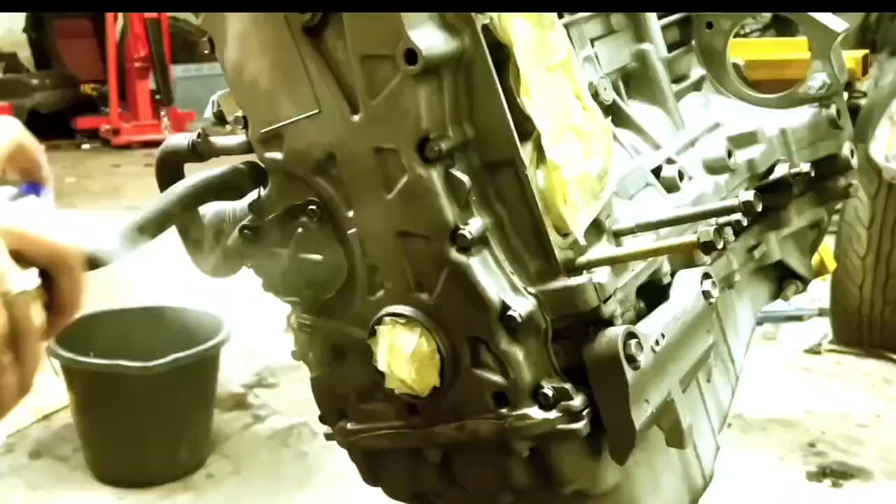This is my £1,000 Civic that I've bought. And today we're diving headfirst into the chaos that is our £20,000 turbo build.

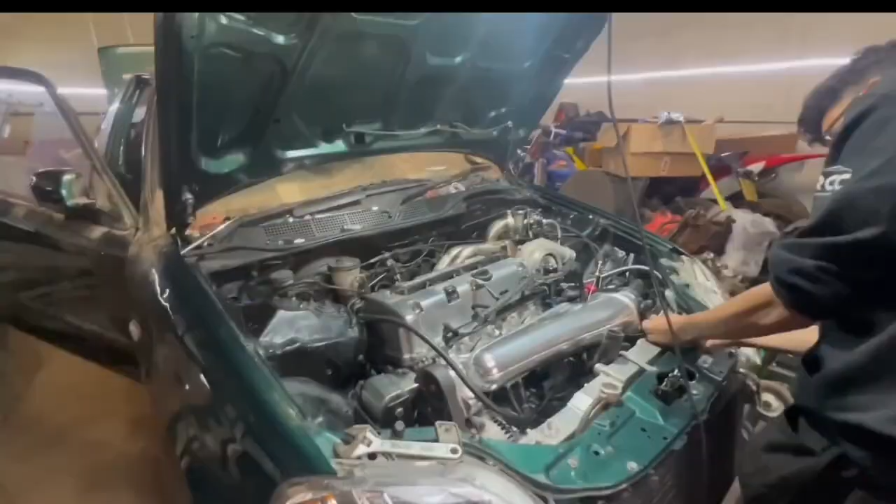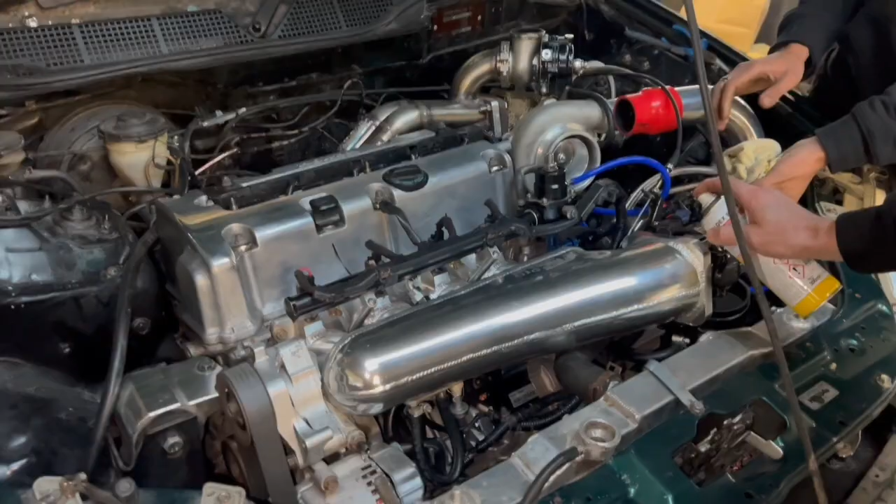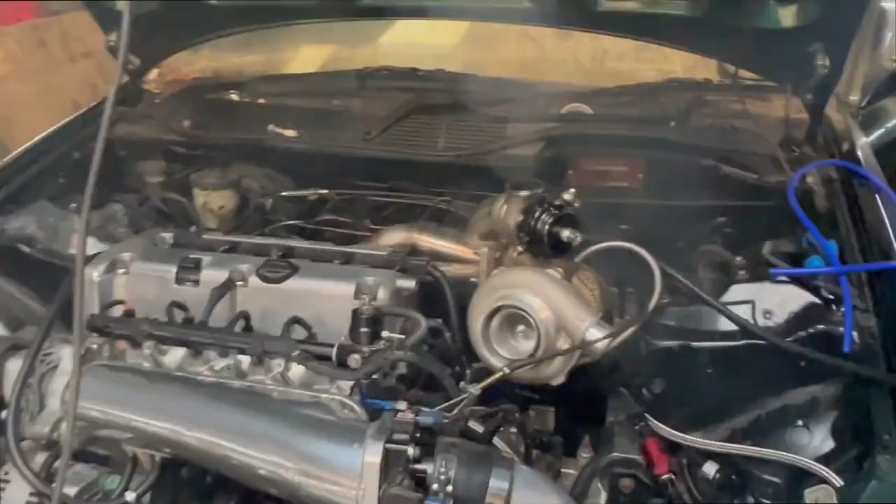If you saw the last episode, you'll remember that we finally got the Civic to fire up, but it sounded like a rotary, literally ran like Chitty Bang Bang. What was going on? This was supposed to be the easy part. The car was built, the drag strip was booked, but the second we turned the key, everything started going wrong. The idle was hunting like a rotary, fuel was spraying out from the lines, thick white smoke started pouring out the back. It was going from bad to worse, and it didn't stop there. I think we blew the engine up. So I'm there thinking, oh my god, this piece's engine about to go kaput.

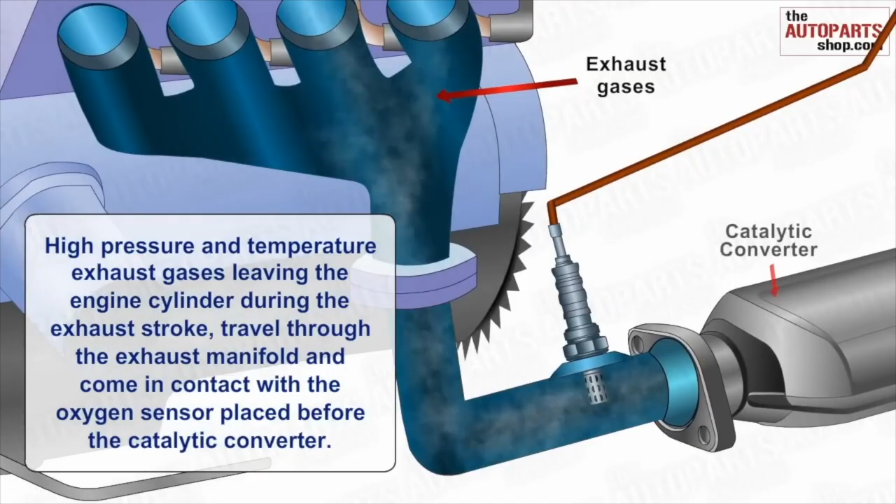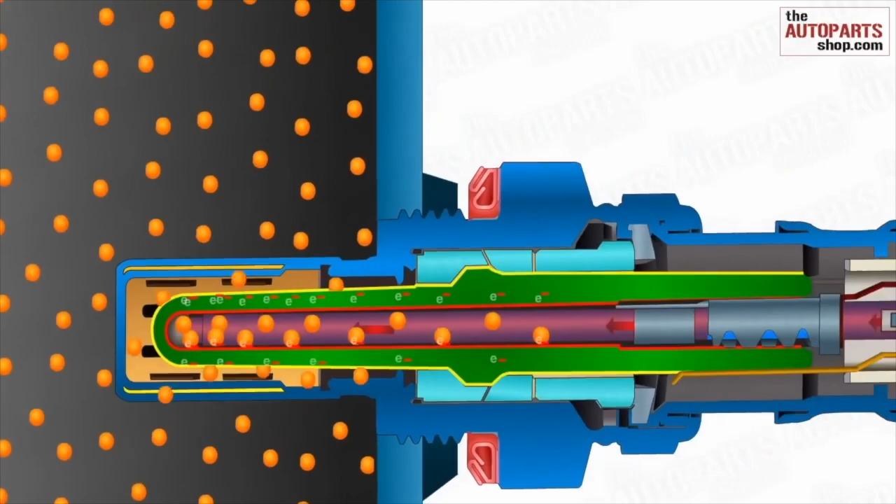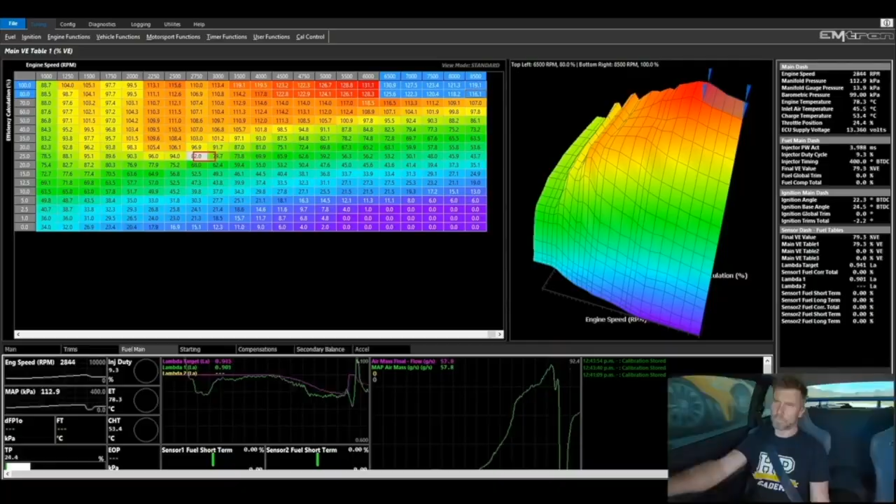Let's jump into it. The next important mod to the K20 Civic build is the wideband sensor. What is a wideband sensor? A wideband sensor measures air-fuel ratio and tells you exactly how rich or lean the engine is running, especially under boost. The wideband sensor is critical for any turbo build. It keeps the engine safe under boost by constantly monitoring the air-fuel ratio. If the engine runs too lean, it can blow up. We're aiming for that sweet spot, 14.7. Too rich, you lose power. Too lean, it's game over. It works with the ECU. If you're using Hondata K-Pro, which we are, the wideband can feed live AFR data into the ECU for more accurate control. Without a wideband, you risk running lean and blowing your engine. It's one of the most important sensors on any turbo car. That's why we're going to install it now.

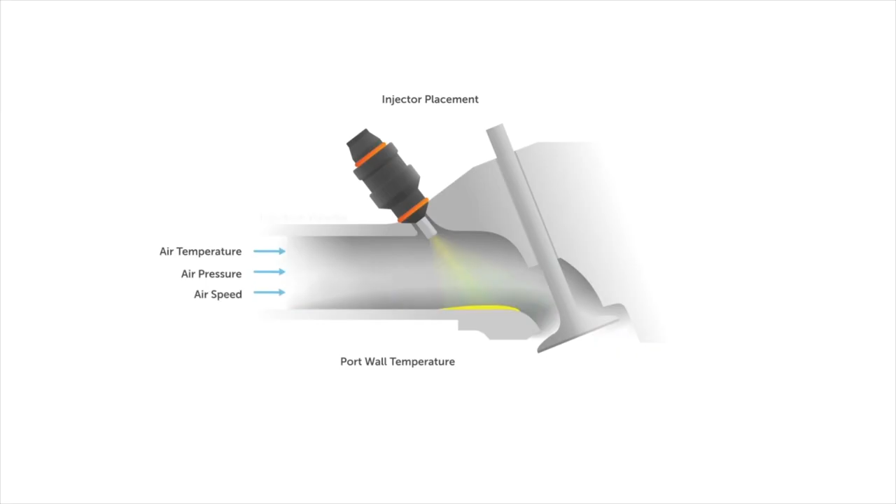Mike the engineer here. Come on, bro. Ta-da. Yes, the wideband's going to be installed right here. Get the boost gauge right here.

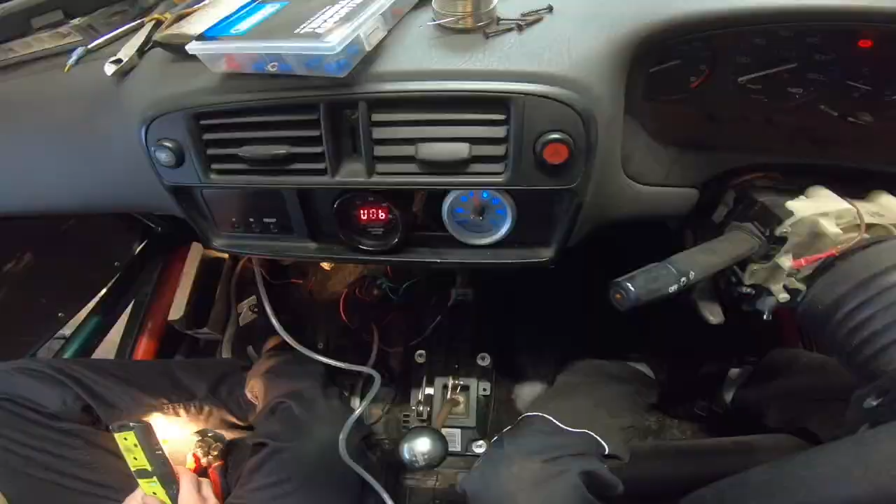So the interior's going to be all sorted now.

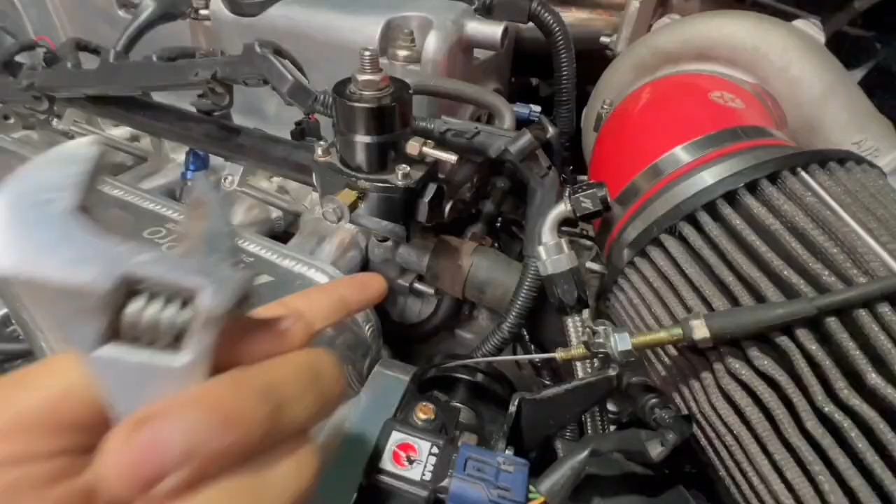We've done a bit of research and we've now got a few things to do to double check the fuel issue. We've gone ahead and taken this fuel pipe from this regulator. We are now going to take this one off and then see if there's any fuel coming out in either of the pipes. This is my first time doing this build. I've never done it before. I'm not a mechanic, I'm going to give it a try.

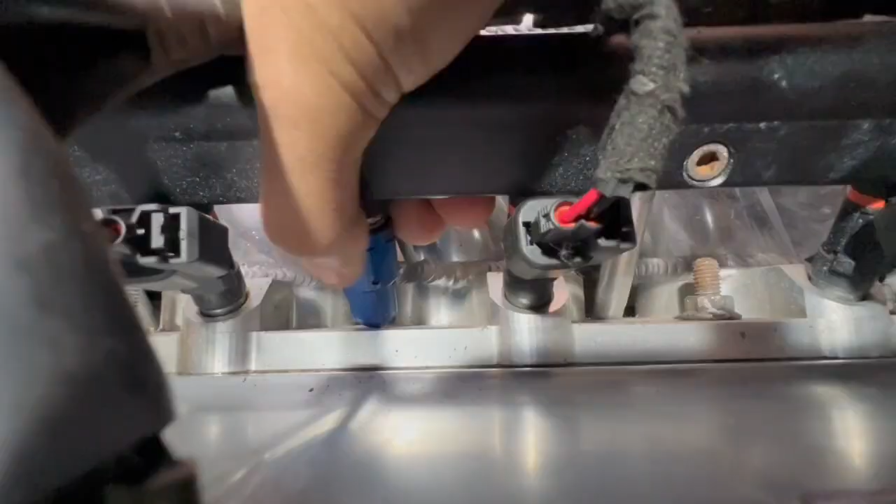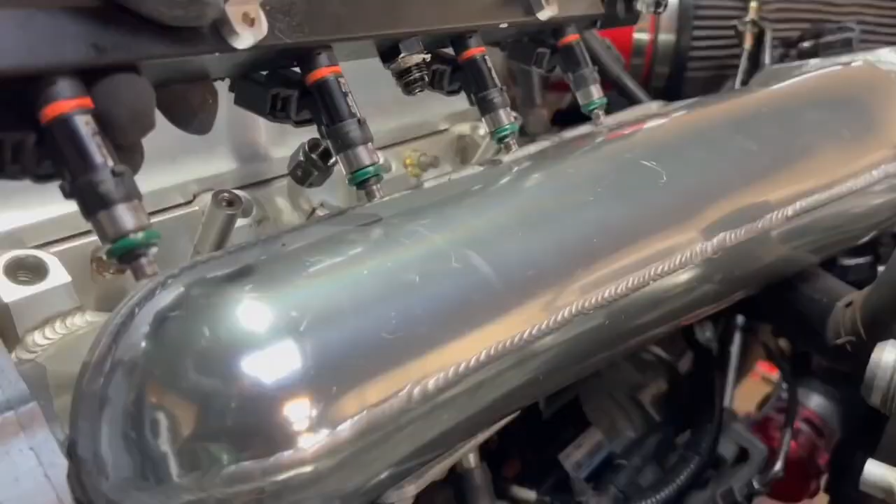So now I've got them both here. Great news, fuel's finally flowing at the return line. Now that we've confirmed fuel is flowing, it's time to see if it's reaching the rail and actually making it through the injectors. Yeah, go ahead. Okay, turn it off, turn it off, turn it off. Come out. Okay, turn it off, turn it off, turn it off. That is coming out like crazy though.

With all that working, the car should start now. I'll try and start it now.

Right, so another issue is this crank sensor wire wasn't on properly, so we got it out, we got it tested, we got it fixed. Now we're going to put this back into the engine and see if it works. Now it's in, let's start the car up and see if it works then. Boom!

After trial and error, we knew that the car was not going to start. So we did one thing, we knew the car started on stock K20 ECU. So we basically just reduced the injectors back to stock ECU level to see if the car starts with the K-Pro ECU. And guess what happened? I'm going to keep it running, you guys tell me when to turn it off. Alright, we're going to start it now.

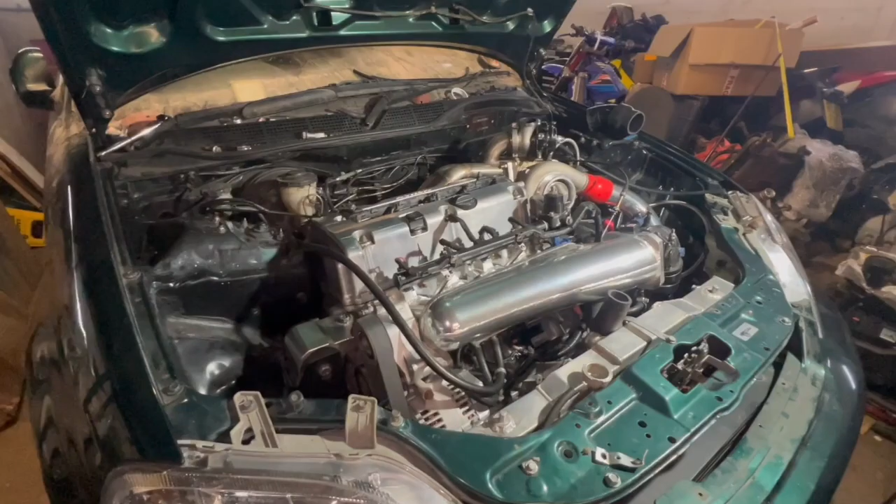Every success comes with setbacks, and this one nearly cost us everything.

Try it again. Yeah bro, it's not feeling it, man. Just very intermittent, isn't it?

So now, out of nowhere, the car's not starting again. Looks like it's time to dive back into the K-Pro ECU and start tweaking the fuel duty cycles, hoping we can bring it back to life.

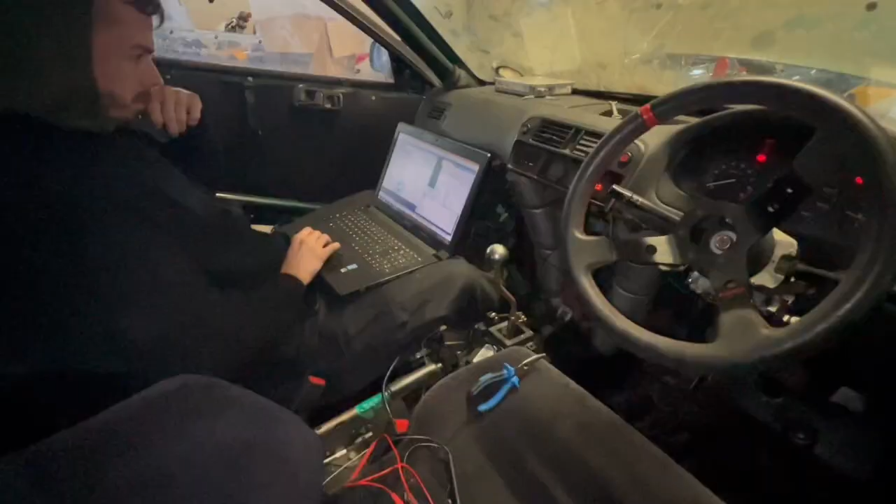I'm going to go anyway, it was 550 before. Lower.

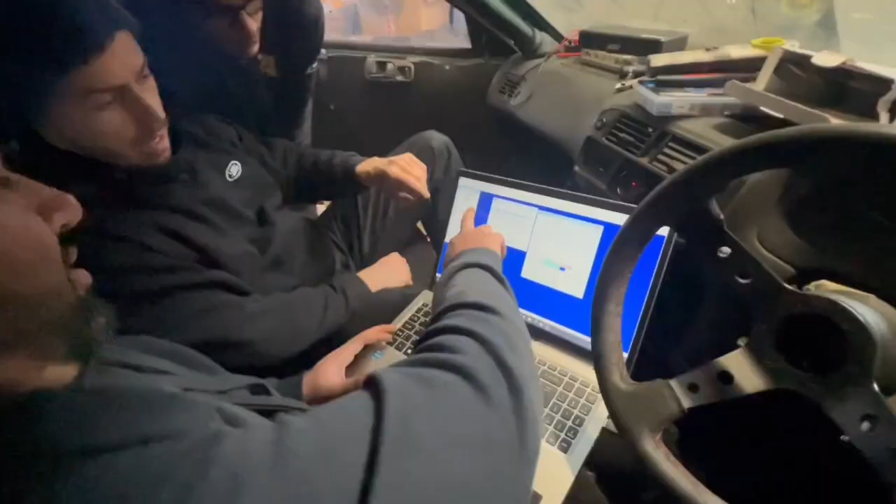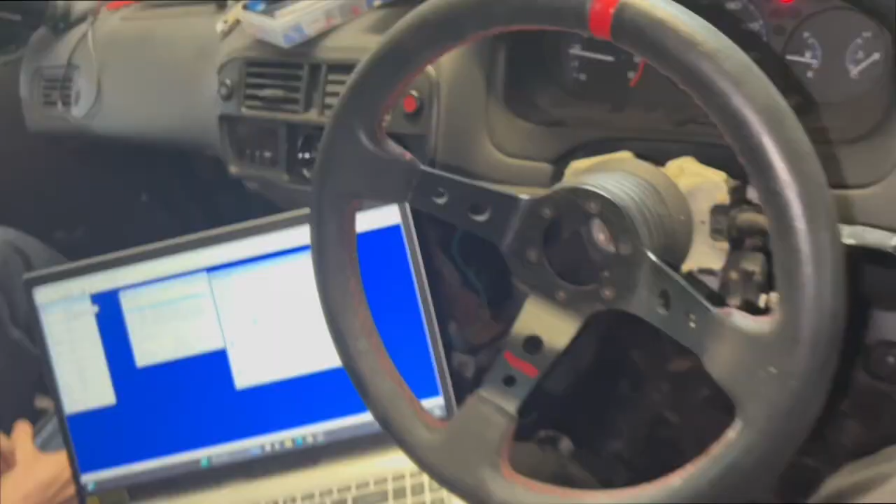The car starts, but straight away it starts blowing thick smoke. Just like that, everything goes wrong again. There's a lot of smoke at the back.

And now with all this smoke coming out the car, we don't know what's actually happened at this point. It's not looking good, guys. I think we blew the engine up, the head gasket's gone.

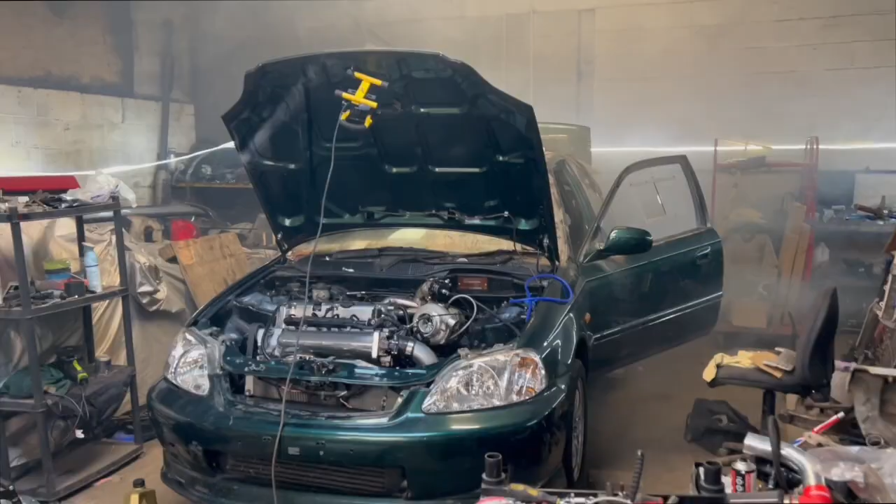At first we thought the head gasket was gone, the smoke had us convinced, but the coolant hadn't dropped and the oil wasn't milky. Two of the biggest red flags just weren't there, but for now it's still alive. So now we need to find out where the air is coming out from. I don't know whether it's the idle control valve with the ECU or there's some air leak.

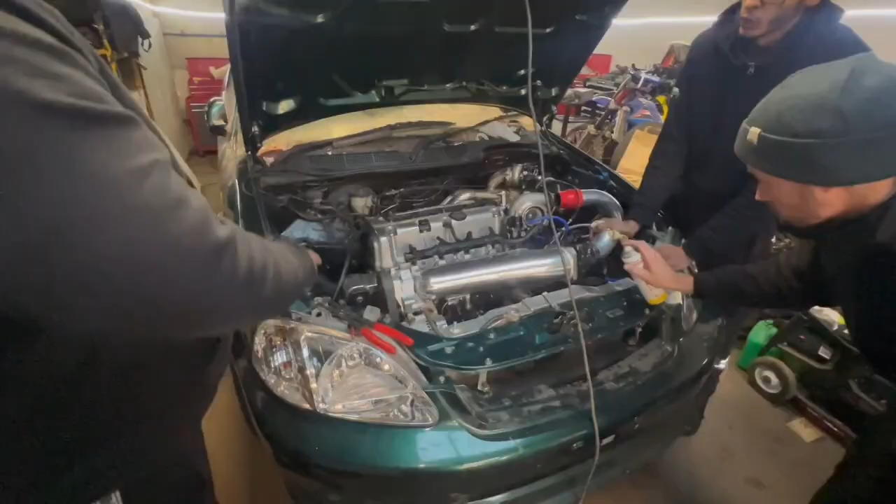Out of nowhere, a burst of fire shoots out between the intake and the engine block. Things just got serious. There are some problems. The car has got a gas leak coming from the inlet manifold, and there's also a gas leak coming out from the turbo manifold itself.

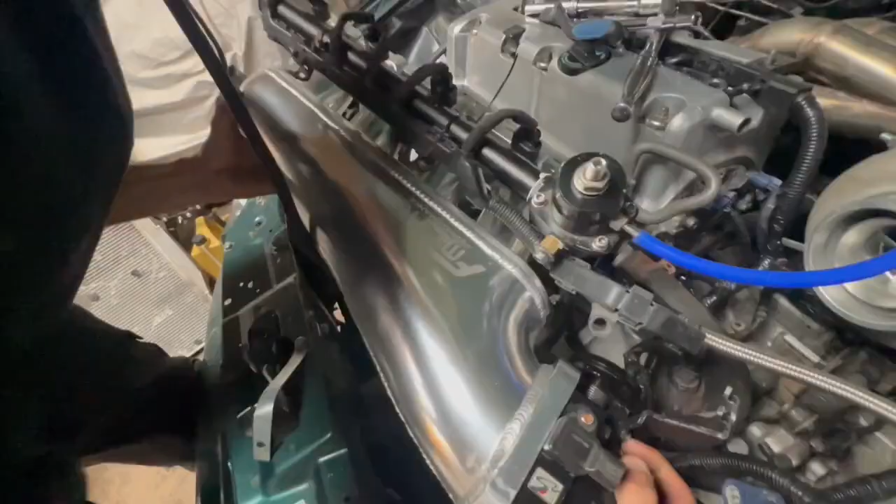Radiator's annoying. There we go, there you go, finally got it out. It's all peeling off. Yeah, brand new gasket it is.

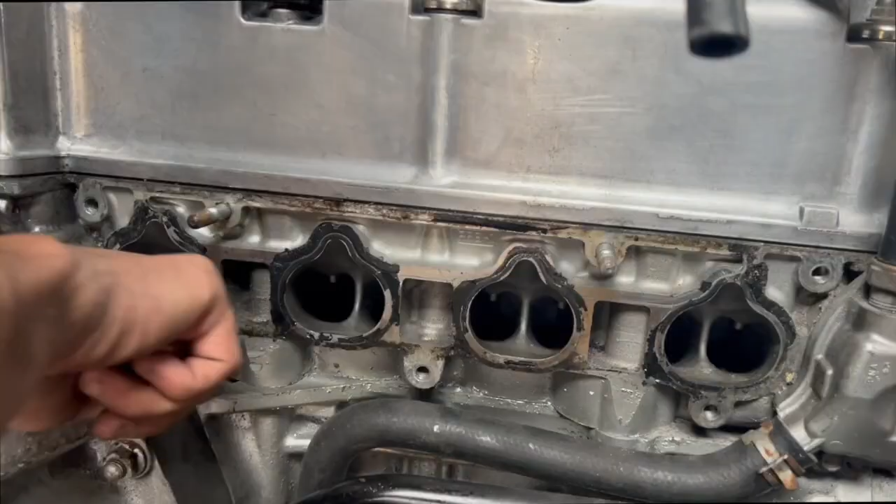So how's the engine, bro? We tested it, we drove this engine in an EP3. Now that we've got the inlet off, because it's like a drag inlet manifold, it just won't work with the stock water pump. You have to get a proper custom water pump for this inlet manifold. But because we're using a stock one, we're going to grind it down even more so it's a perfect fit.

We didn't know because we couldn't get the car started to find out, but now we know we can do it properly. After speaking to a few Honda people from the Honda community, a lot of people have said we might have toasted the ECU.

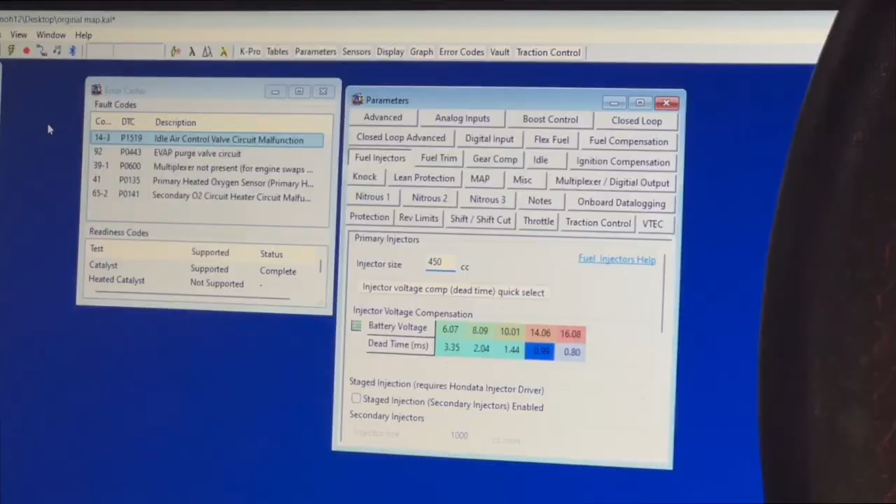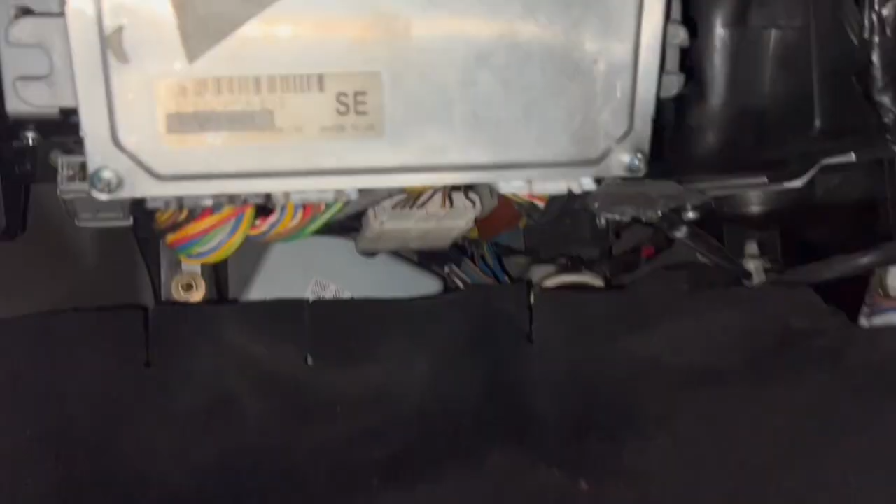The new ECU's in there, the K-Pro's ECU in. Now we're going to find out if this car starts up. Start the car and we'll find out if the ECU is good. So here goes. I feel like it is going to start. If it doesn't, I'd be shocked.

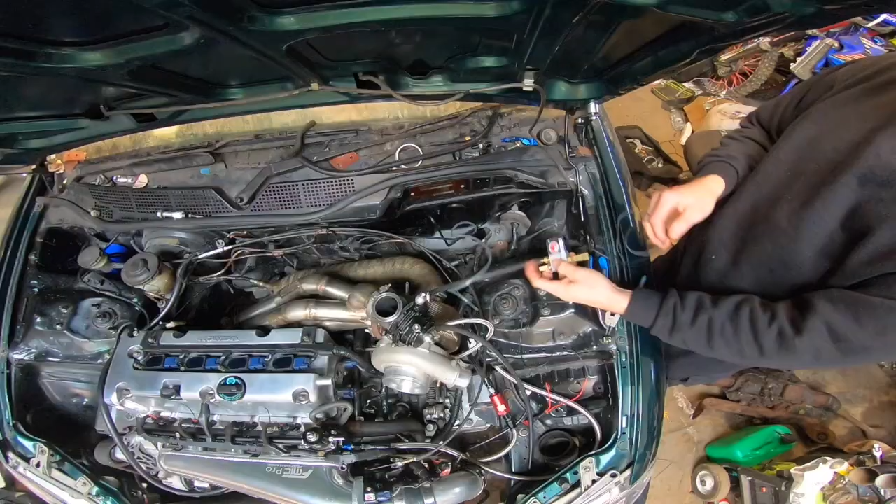Well, the ECU is good. Look, it's running all right. The ECU is good then. Oh, that's £1,000 saved then. Now at this point it's happy days because the ECU is not toast and we still get to save ourselves over £1,000.

Battery's all in, we're going to start the car up and hopefully this car is going to move from the ramp after God knows how long. But we need this onto the trailer because we're going to be visiting a person that holds a record of having the fastest Civic in Europe. Let's see if this car moves.

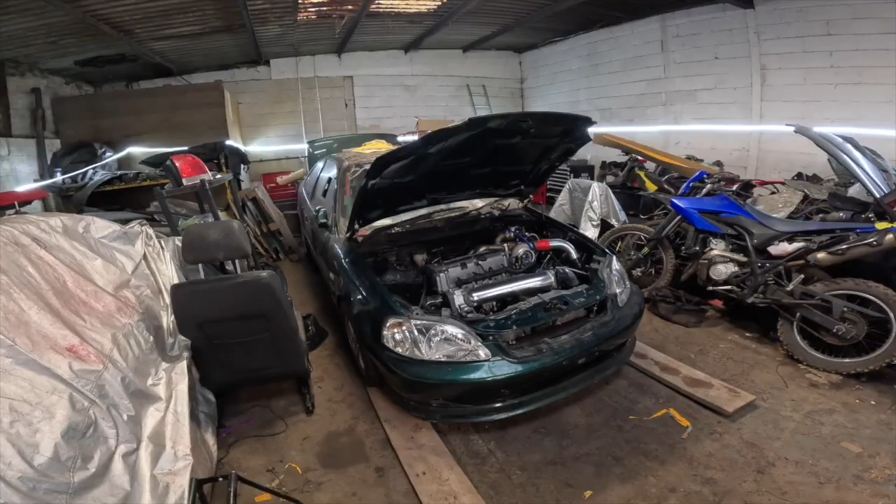Never did I think this Civic would make it out the unit, but here we are, driving it onto the trailer under its own power, on all four wheels. Is it finally ready? We're about to find out.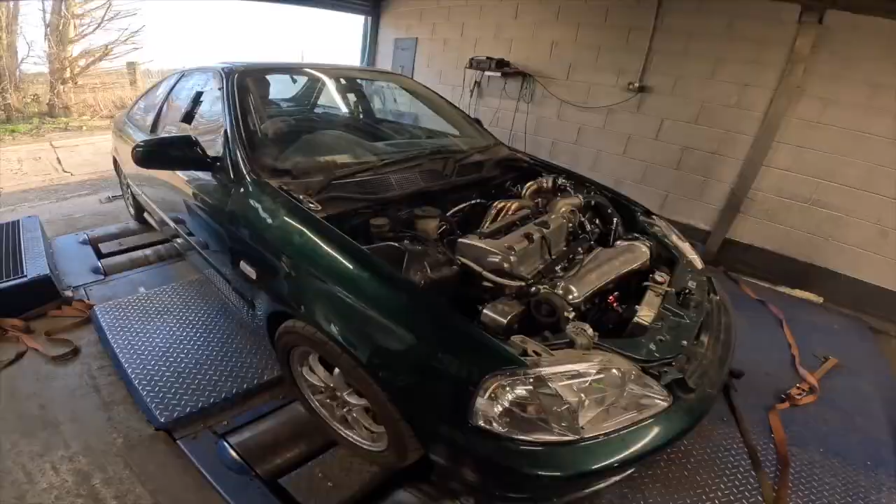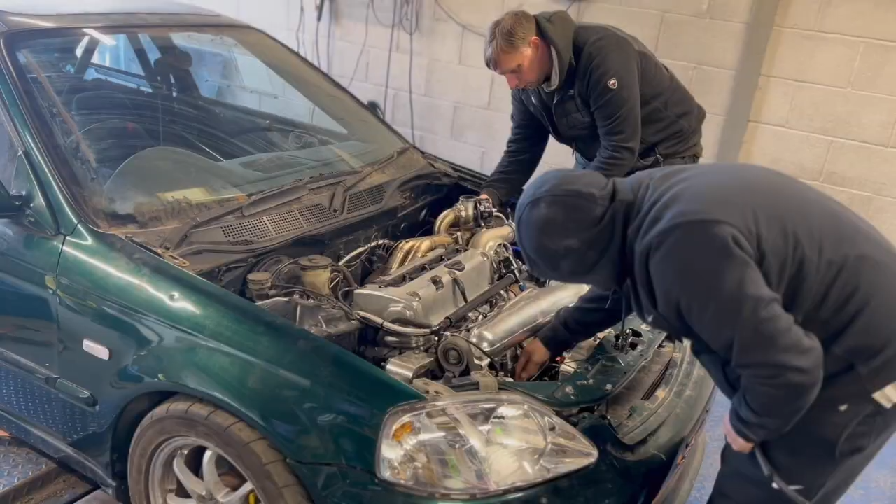We've just arrived at Street Racers where Gordon's about to dial in the tune on the £20,000 Civic build. When you're running out of time, out of options and chasing records, there's only one place to go, and with BMT holding the crown for Europe's fastest Honda, this is where serious cars come to get finalised. So here we are at Street Racers, ready for the Civic to be tuned. Let's find out how much power she makes, and I hope she doesn't blow off.

We're waiting for this final moment right here to see if it all pays off. And we're going to find out together. He's doing his magic. We're up here, Gordon.

Yeah. Come on, I want content. So what's going on now then?

Find a map in here. Just calibrate the TPS. Just got the map sensor settings in. Is that what I'm hearing right now as you're pressing it? As I'm uploading that, yes, so then the fuel pump will recycle.

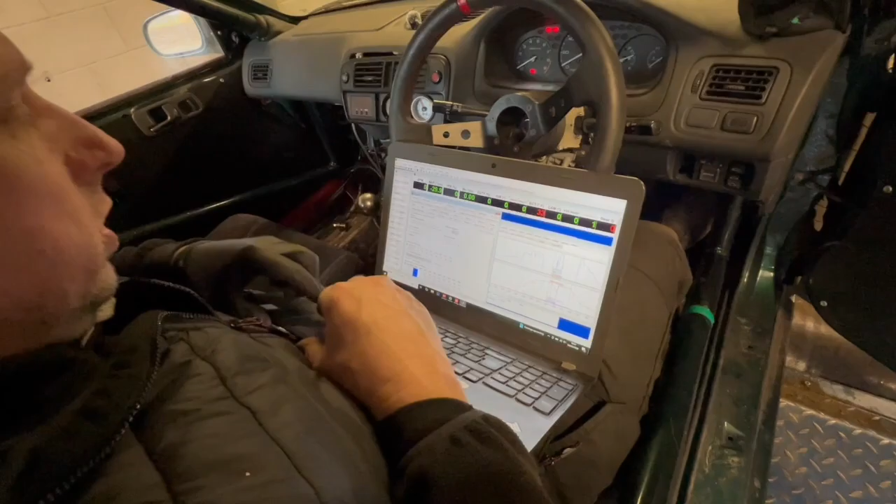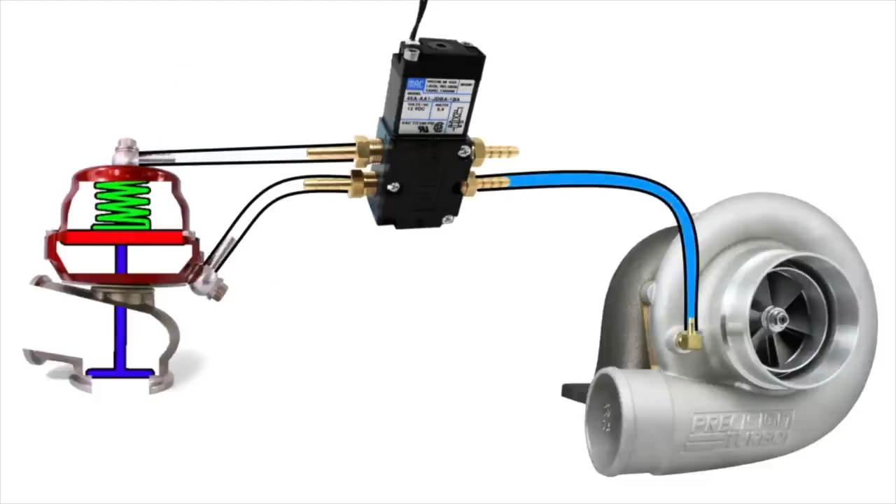Mad. Gordon found an issue within minutes. The wastegate spring was only letting the car build 3 psi of boost. That's nothing, the turbo wasn't waking up. So we switched to a 4-port boost solenoid, which gives the ECU full control over both sides of the wastegate. Basically, it lets us keep the wastegate shut tighter for longer, so the turbo can build serious boost before it opens. Okay.

Oh, we missed the clip, man. No, you gotta take it back up now. Go on, ASMR video this is. Okay, go on, click it.

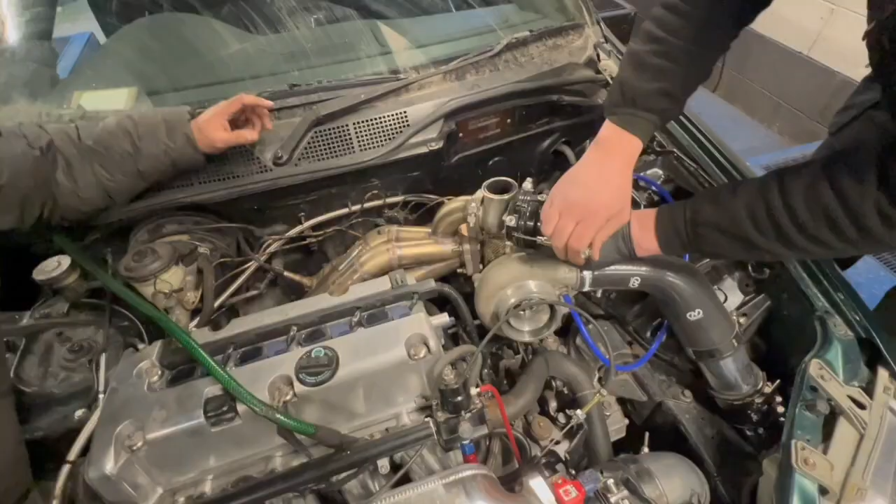With this setup, we swapped in a 10 psi spring to get traction back and let the ECU handle the rest. This way we'll gain maximum grip and put down power more efficiently, instead of just spinning up the wheels from too much boost and no traction.

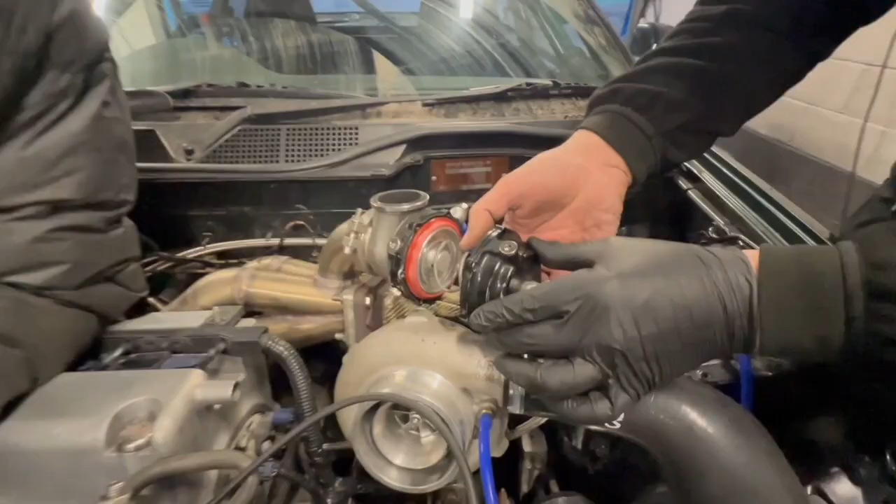So let's keep tuning. Oh, it's quite hard to use, yeah. Yeah, it's harder than you think. Really solid, you know? Yeah.

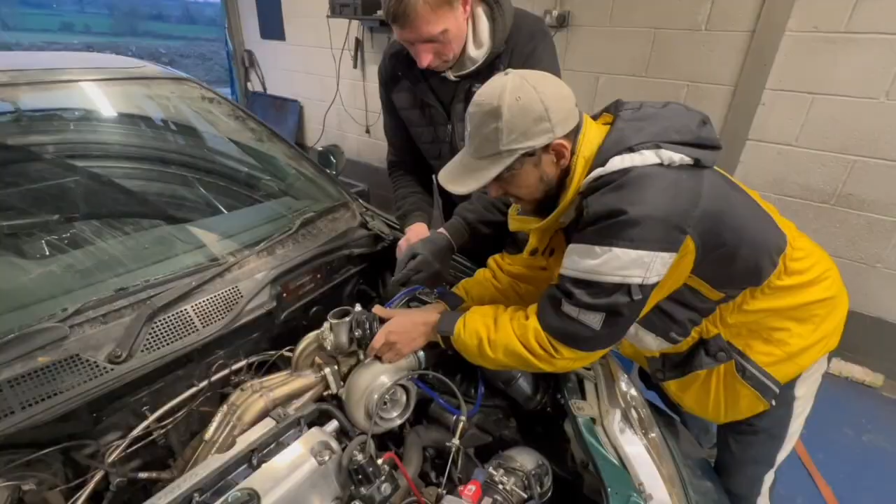Give me a... I'm the cameraman today. You've got to let me get in there. Right here, he's actually doing some proper stuff. Or else this car's not getting mapped.

So, mark it, let go. Ba-ding! Yes, there you go. Thank you very much. Big man jam, come on.

Cameraman to the world. When tuning a car, there are always problems, and this is one of them. Fuel coming out of here. I didn't record it from here.

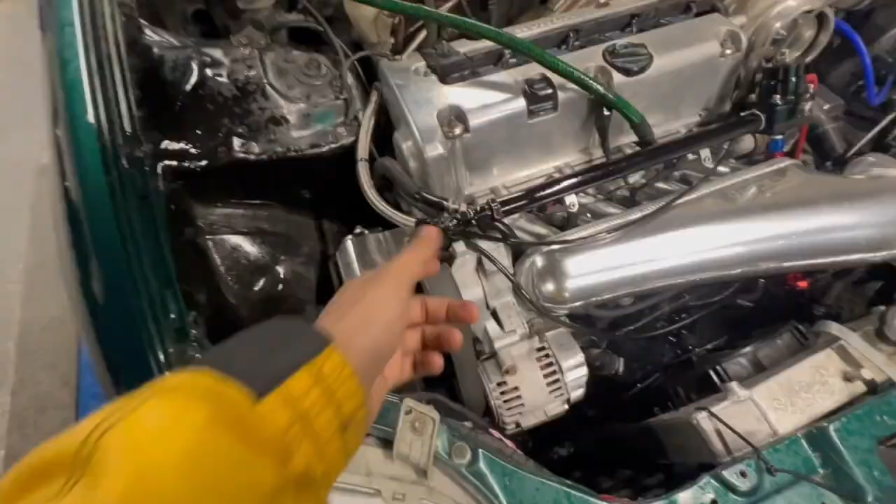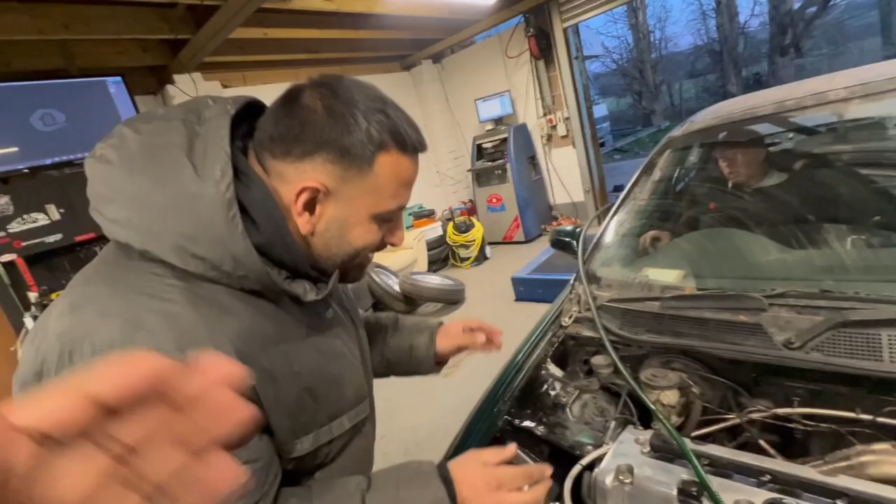Jeez, you did that on purpose. You did that on purpose. That is bad, bad line. The line come off. If the line just come off, yeah. Always look like it come off on full chucks, isn't it?

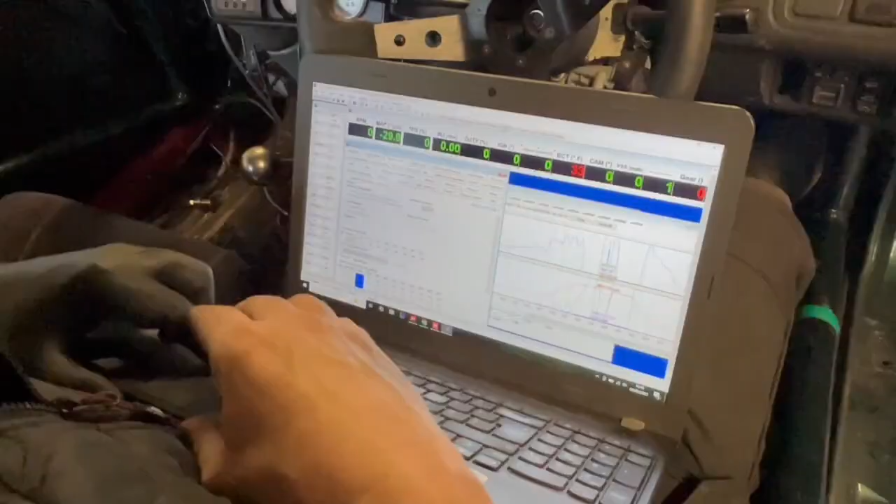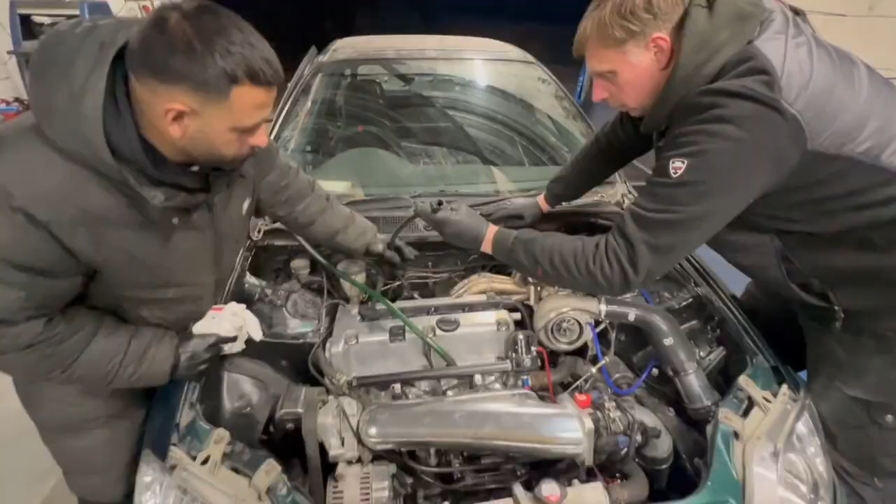As Gordon stated, increasing the fuel duty cycle, the fuel pipe literally popped off, just blew open under pressure. It turns out some parts you grab off eBay look decent, but when the pressure ramps up they can fail fast. Luckily, Gordon had a proper set of high pressure fuel lines imported from the States, built to handle serious power, because the last thing you want is to be doing 100 miles per hour with fuel spraying all over a hot engine bay, and then saying goodbye to your 20k Civic.

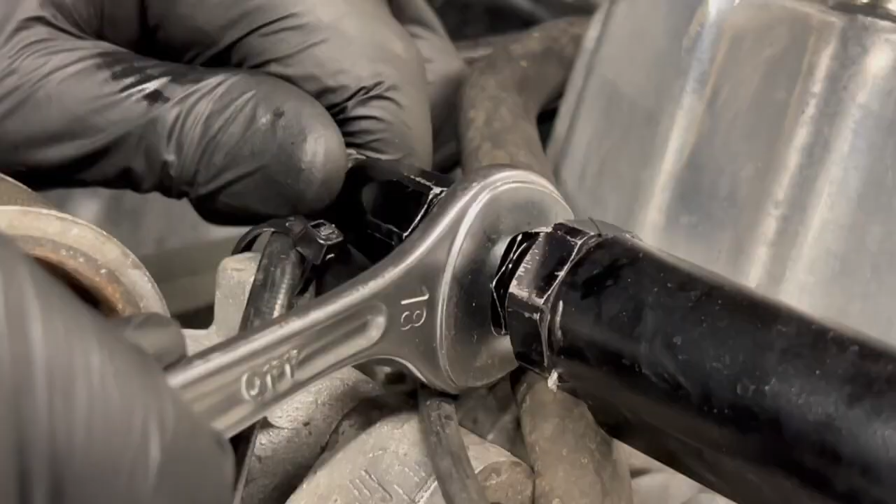Again, Gordon has saved the day, but this is it. So Gordon has put brand new lines, but from America, so this ain't gonna leak now. If it does leak, we'll come back. I'm joking. Now all the major issues are ironed out, let's get back to tuning.

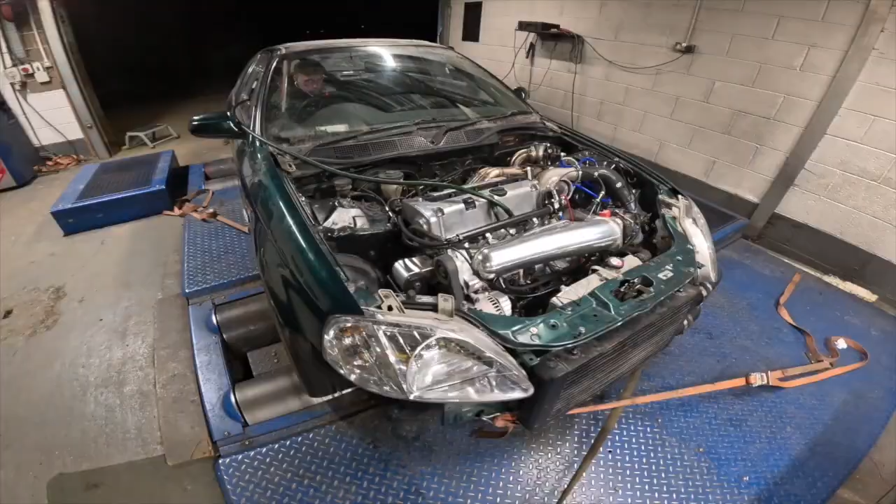I'm not gonna lie to you guys, I'm buzzing right now. Seeing the 20k Civic finally ripping it on the dyno after everything we've been through, it's unreal. Wait till you see the power figures, you're not gonna believe it, especially after some of the comments in the last video.

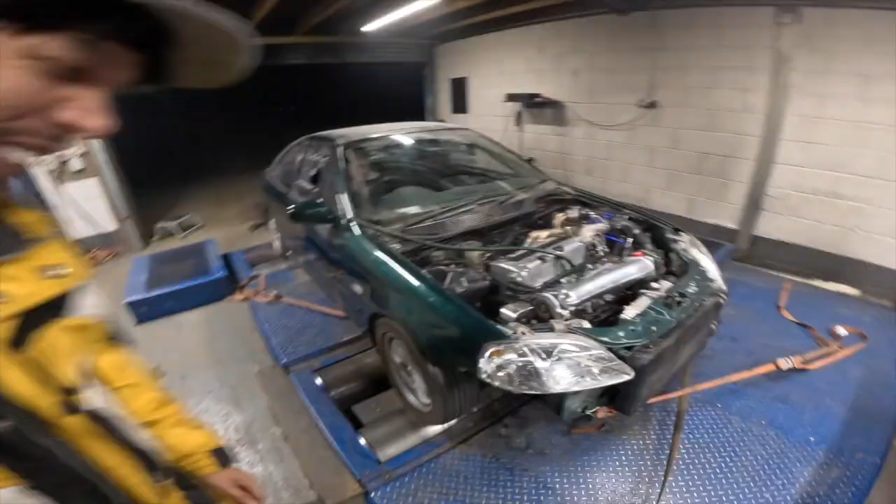Let's see who was right. 371 brake horsepower, just 29 brake horsepower more, we're at 400. And we're actually gonna do it tonight. Let's keep pushing, boys.

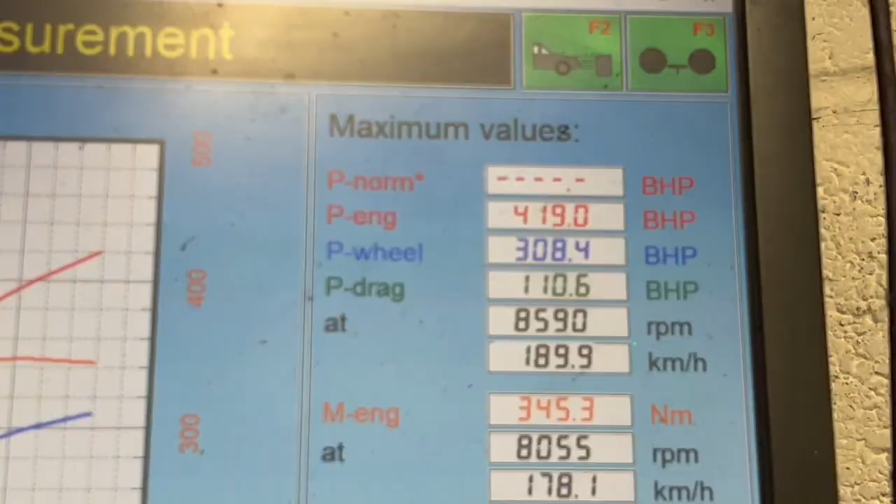Whoa! Yo! 419, that was. Can't even see it, the internet's not caught up yet. 419, man. We did it, man. We did it. Thank you, man.

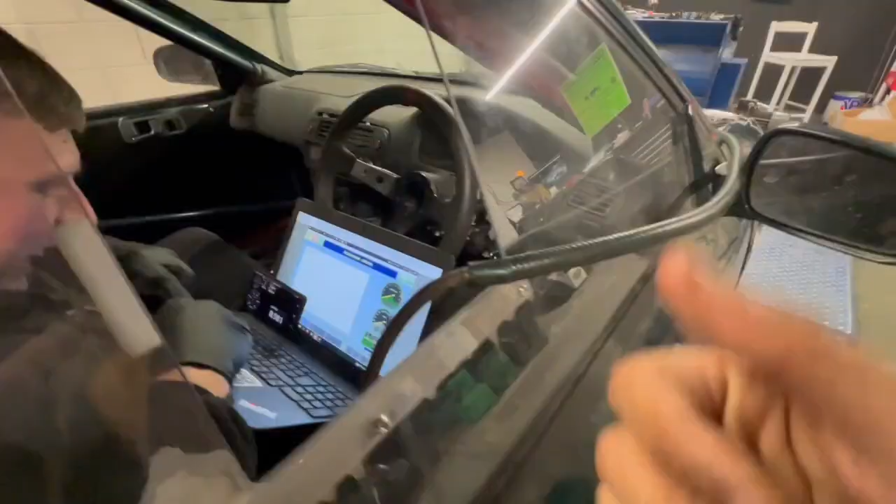419 brake horsepower, guys. We did it. And that's not the end of it. We're still gonna keep pushing.

Whoa! 437, bro! 437! Alright, before we turned up the boost anymore, I had two options.

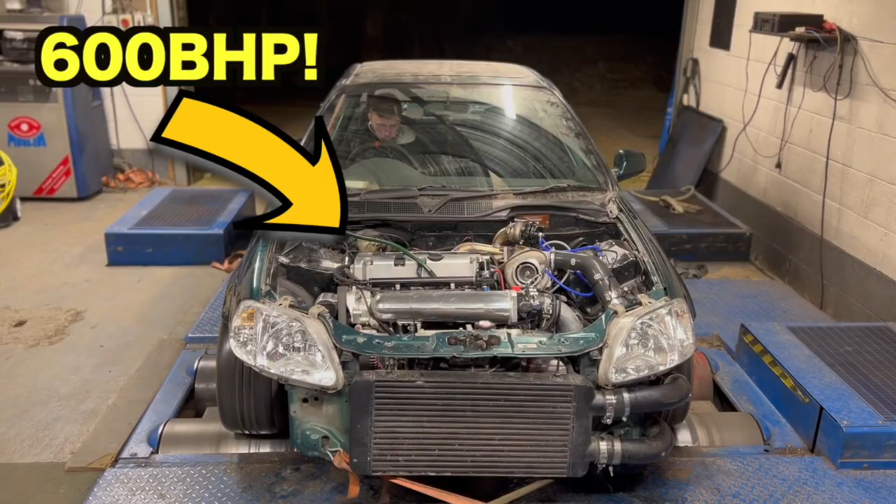Option 1, push for 600 brake horsepower using methanol injection. It's doable, it's tempting, but it comes with one risk. Let me show you guys.

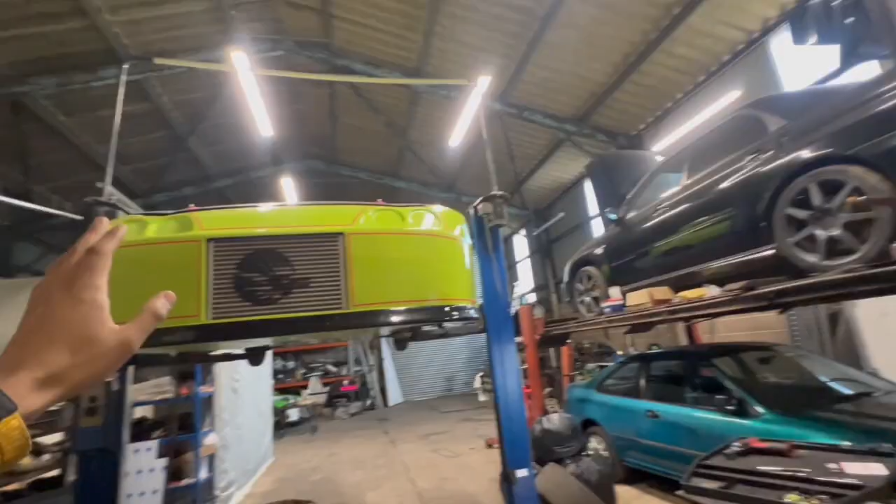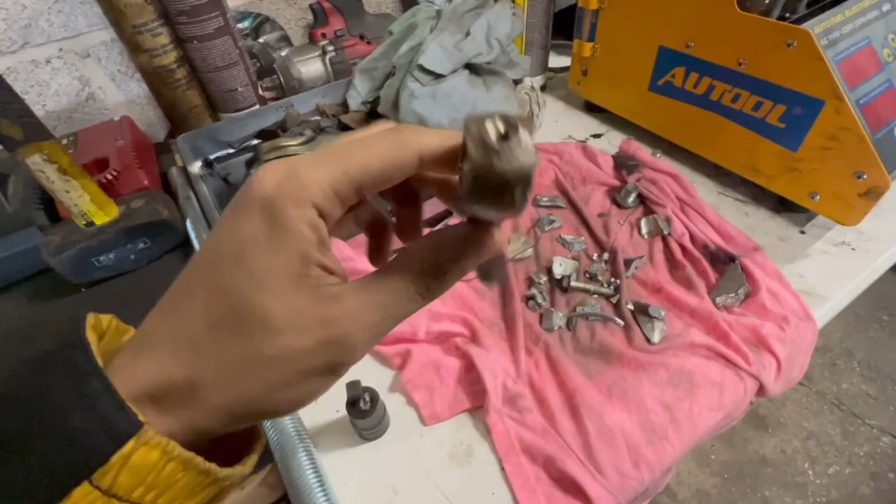So this is actually Gordon's DC2 Integra, basically the number 1 stock block in the world, or in Europe. Oh, definitely second in the world. Second in the world, first in Europe. So this is the first quickest stock block, a K24A3 from an Accord that does 9.5 seconds, and on the last run it broke a rod. Crazy, right? Yeah, that was on full meth on the stock block. Wow.

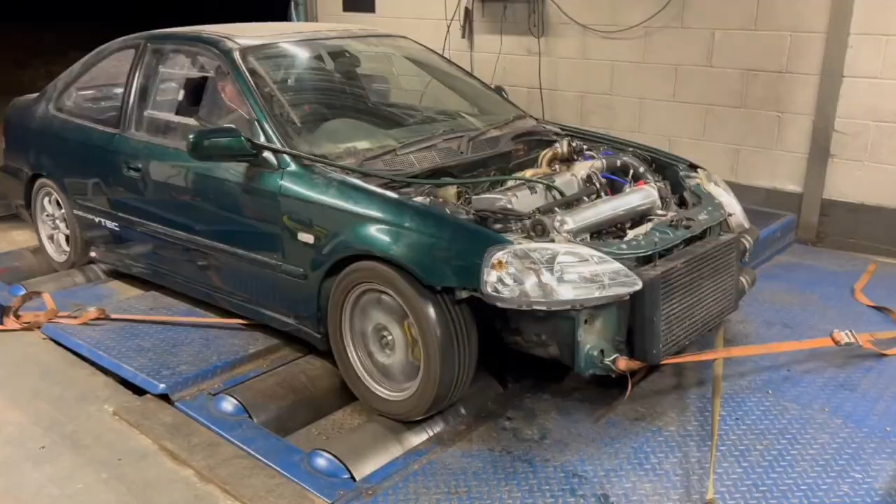Or option 2, dial in the perfect power for reliability and longevity. And here's why it matters - we're not building a dyno queen. This car is going to get thrashed on the drag strip and on the road, hard. If we squeeze any last horsepower out now, we're asking for broken parts later. We made the smart call, and that's choosing the sweet spot: 450 brake horsepower.

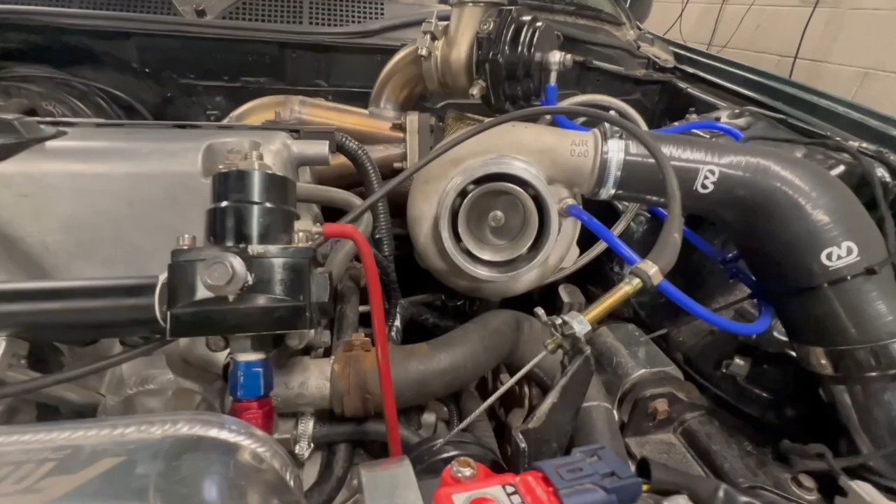The 20k Honda build is finally complete. The tuning's done, the power's dialed in, now it's time to bring her home.

Go ahead, straight, perfect. Good driving, man. Good driving.

And now we are back in the unit. We went through so much, but we're back, safe and sound. All we need to do now is get this car ready for the roads.